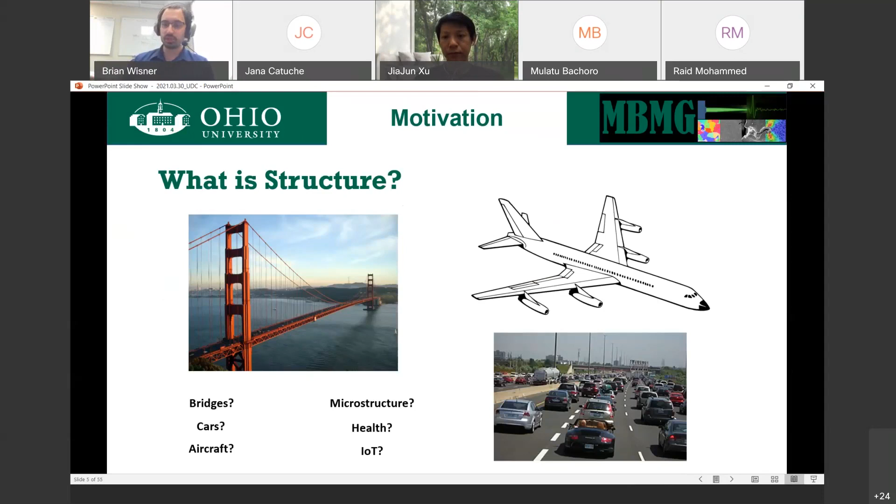Another term that I'm leveraging quite heavily is IoT - Internet of Things, mechatronics, the connection of electrical systems and mechanical systems. There are many terms I've heard for this. Ultimately, it's us trying to leverage as much as we can of knowledge of mechanical systems as well as electrical interfaces to improve the results we can obtain, to make things easier. If we're talking about advanced manufacturing, that's everywhere - we can't ignore that. So we're talking a little bit about all of this.

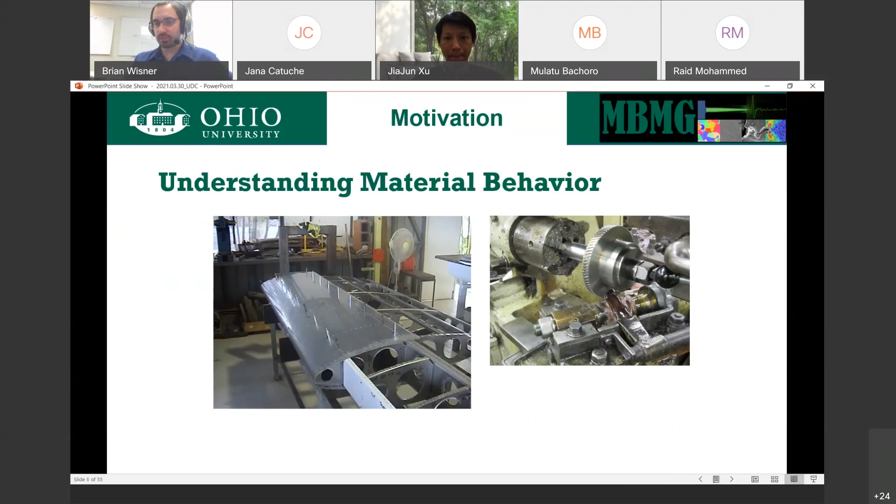So again, the focus is understanding material behavior. So if I want to understand the structure of the wing, understand this gear that I'm producing, I have to remind myself that as we zoom in, we're talking about a microstructure.

A different microstructure will produce different results. That's given. So if we can control the microstructure, if we can understand the microstructure, we have the benefit of improving the material properties to be something we may want. We can tailor the structure.

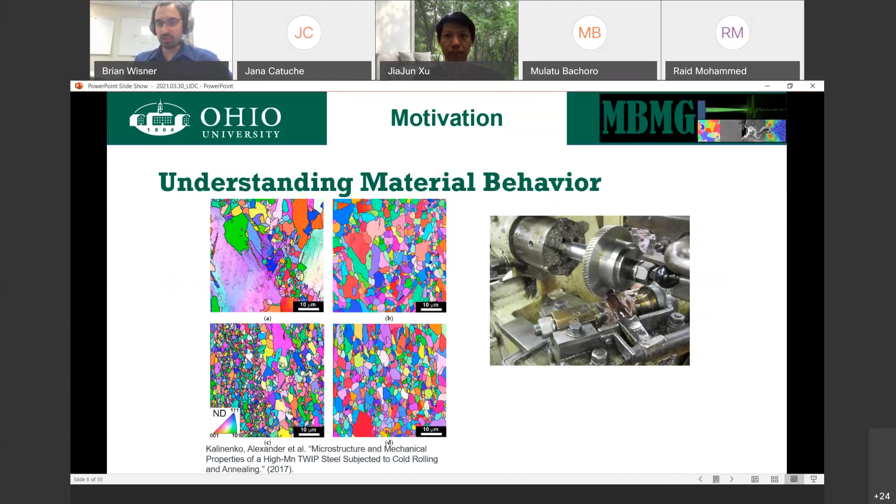We can alter it. Some of the ways we commonly do this now is in the manufacturing process. We do a rolling process, and it's going to alter the microstructure. In the case of cold rolling in particular, it's going to cause us to have elongated grains in one direction. That's useful in sheet, not so useful in a bulk, large structure where you want isotropic properties. But we can control that.

We can even go so far, in some concepts, as to induce cellulose in cement. We can add different elements at different scales in order to change the properties. Most of the time there is some thought behind this as to why we would do it, but we don't really know what's going to happen until we try it and test it. We can guess, but we don't really know. So part of the question becomes, can we monitor what's happening in order to figure out the result before we actually have to build and test all of these components?

And that leads us to this figure that I use all the time, from McDowell, showing the concept that materials are multi-scale. If we want to understand macro scale behavior, we have to understand what's happening at the subscales that lead to that.

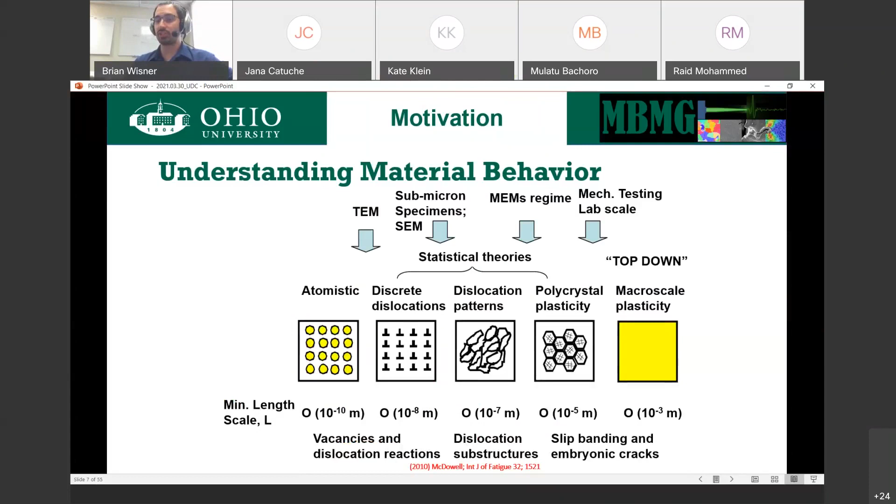That means we have to figure out what scale we are actually going to test at, what we're actually looking for. The questions being: what are we monitoring, what are we looking for, how fast do we have to be able to monitor this? Can I take an image a second, or is this a very fast process that happens instantaneously and I need something way more advanced? What scale is it happening at, to know whether I need a microscope or I can get away with a standard camera? And then where am I going to look for these things?

So how do we figure that out, how do we start working with that? The approach I'm using leverages microscopy - standard EBSD, scanning electron microscope, optical imaging, basically any way you can think of to get an image of what the microstructure looks like - combined with non-destructive evaluation tools.

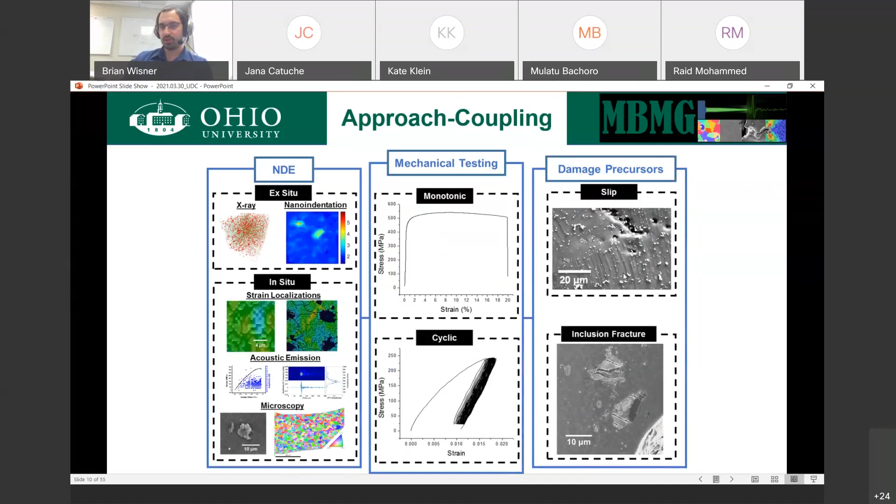From there, we can start to do a lot of cool things. For example, we can start combining techniques, DIC and AE together, surface information with volumetric information, to see how things evolve over time. We can start delving into the acoustic emission, and instead of just looking at a single waveform or this representation of dots, we can start to extract features that describe it. Those features can then be leveraged in machine learning outcomes to determine whether or not we have damage.

In this particular example, we're talking about aluminum monotonic and fatigue testing that this method was developed for. The emphasis I want to make is that those defects we found in testing produce the same type of waveforms that the defects that happen during manufacturing processes produce. So this is one method for us to start building a training set of data to leverage in machine learning if we want to do more advanced manufacturing type applications.

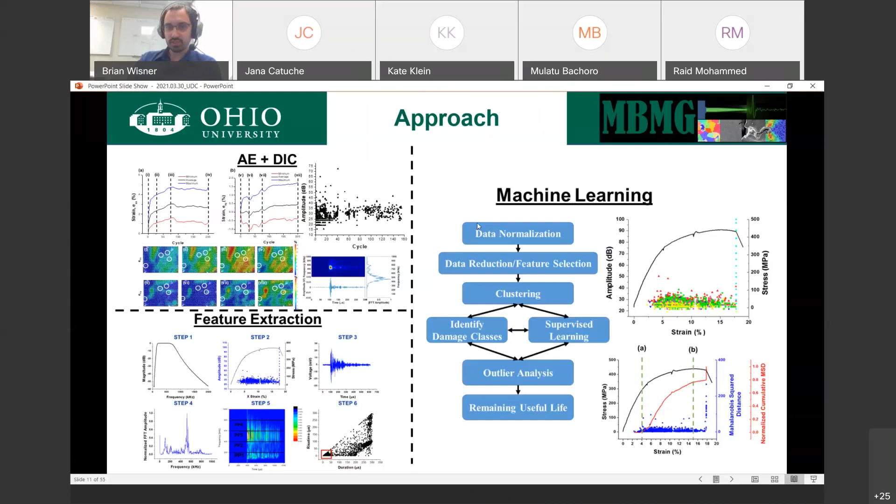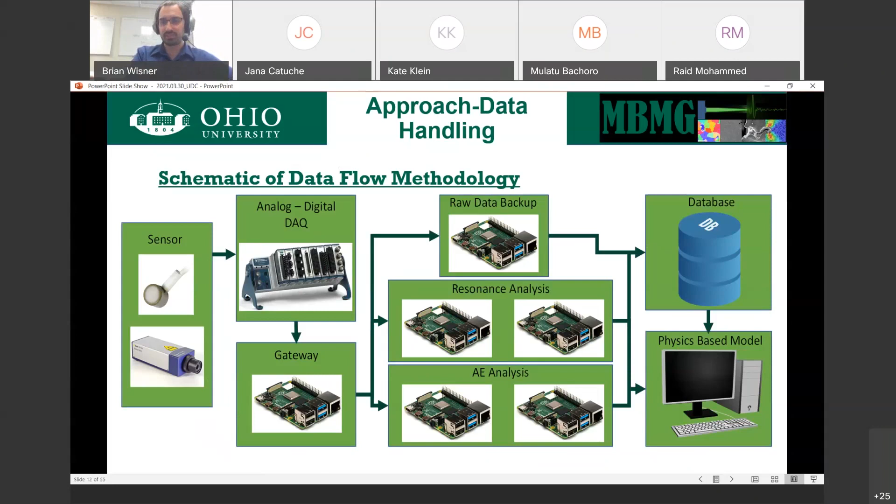Based on what we learn through materials testing, based on what we learn by interacting directly with the material, we can code this system to be able to do that analysis for us and ultimately compare it to models. Why? That's one of the easiest ways to do prediction. If we can get a nice connection between the physical and the model, we now have a way to help improve our data sets, to help really probe and turn knobs individually in a model that you can't necessarily do experimentally. Things aren't always decoupled experimentally, as much as we may want them to be.

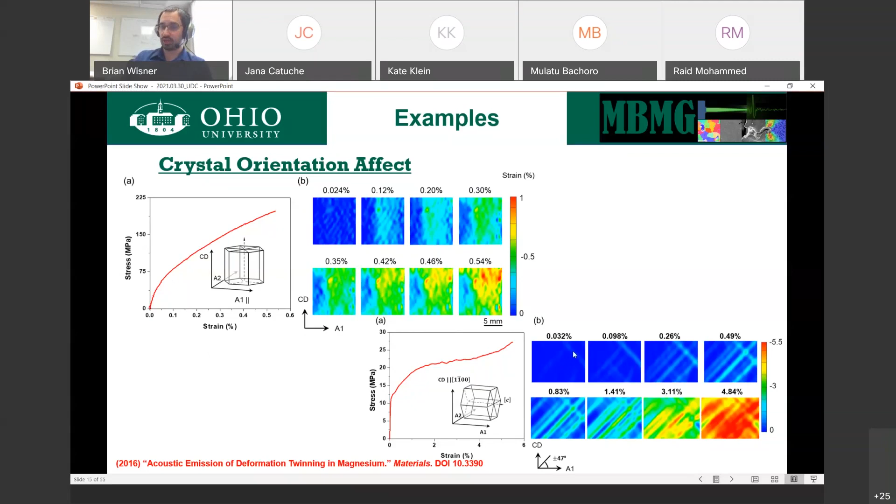We see a difference in the mechanical behavior as well, but that mechanical behavior comes directly from what the damage mechanisms are. That comes directly from the crystal orientation. Depending on how we manufacture, we can achieve preferential directions in one of these orientations or the other. If we do, we end up with a material that has preferential orientation and ultimately has different mechanical behavior. Makes sense.

We can then monitor this and not just look at the difference in mechanical behavior, but look at trends in non-destructive testing. So these dots that you see in both cases are acoustic emission trends. In both cases, we're seeing, generally speaking, that if you look at this, we have material here, we have energy in both cases that spike around yield, but there's a very different amount of activity going on. Why?

The reason is that the microstructure is evolving differently. The case here where we have the predominantly red orientation corresponds to the situation where we have predominantly dislocation type motions leading to failure. In the case on the left, the ND samples, we actually induce a mechanism called twinning. So we're causing a specific damage mechanism to happen to change the behavior. Usually we like to avoid these twins in order to ensure we don't nucleate cracks in fatigue. So knowing this, we can actually choose material orientations and subsequently choose material manufacturing processes that can give us that preferential direction.

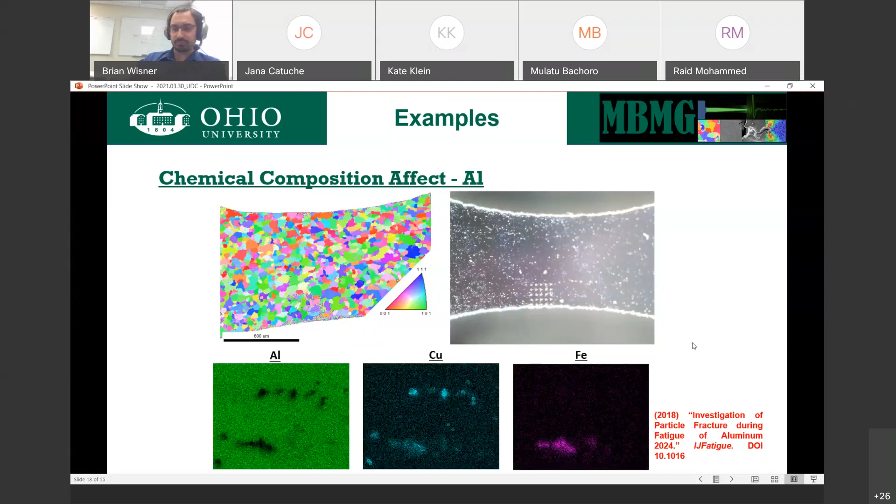Just so you're aware, we went through and validated what each of these particles is made of, and there's a reason for that. We also went through and characterized what the structure looked like to begin with, just so you have an idea.

The red are the particles, the green small dots that are very hard to see are voids. This particular material was hot rolled, and we achieved a material that has very low voids, a very small amount, and not too many particles.

And we characterized how they're distributed in space. In this process, we achieved a material that has particles fairly uniformly distributed. The particles in this case are represented by the blue histograms. And we have voids that are not quite uniformly distributed.

They seem to predominantly exist below the surface in the normal direction. So as we rolled, we essentially affected how the voids on the surface compare to the ones below the surface. That's going to change the way it behaves.

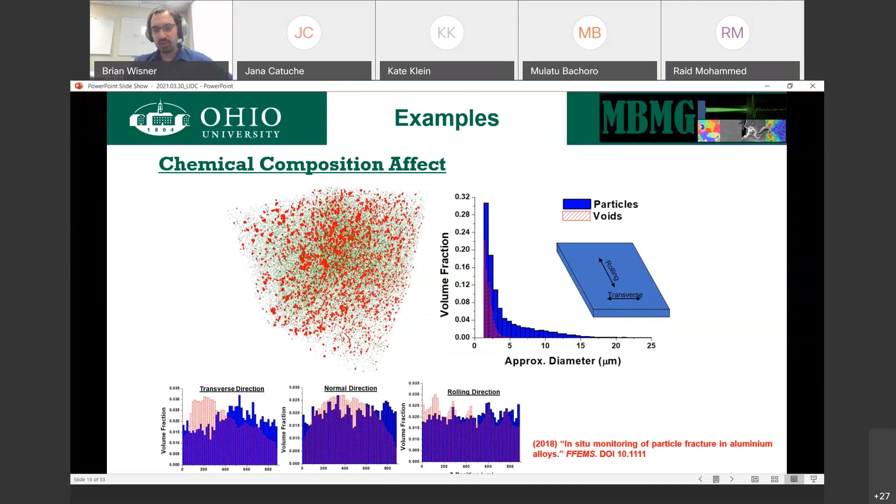If we look into this, we want to keep in mind that not only do we have voids that are different, but we have different particles that exist within here. And as we process this, as we apply loads to this—and anytime you think about processing, there's going to be loads applied, mechanical or thermal—either way, it leads to stress concentrations, strain concentrations, and damage if we're not careful.

This is an example of some of the particles that exist, 3 of which broke, 1 didn't. The copper-rich particles seem to be stronger. That's useful information.

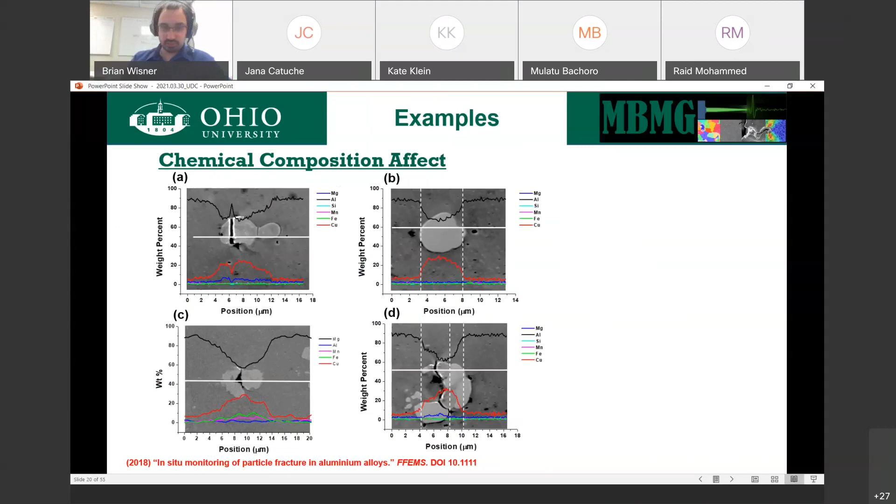But the real takeaway here is if we want to think about this material, it's made of aluminum, and these particles are essentially embedded in it. It's basically like a composite. And if we map the material properties around this area, you will see that there are concentrations of elastic modulus and hardness that are different from the surrounding aluminum. This difference in mechanical properties is going to cause stress and strain concentrations and lead to failure.

Can we detect that? Well, first, let's figure out, to some extent, what we might be interested in detecting. So to do that, we're going to do some modeling.

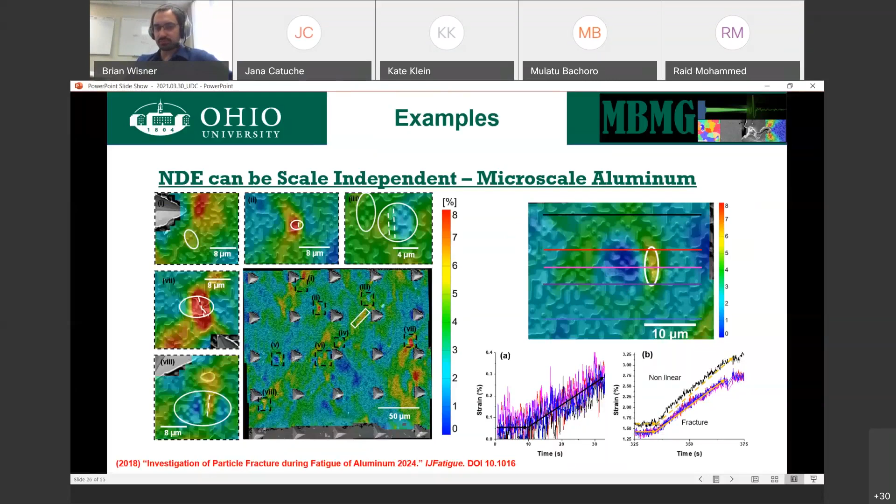Well, the question becomes, can we actually detect these? Do I need to actually image this at the microscale every single time if I want to be able to figure out if it's getting any better? Short answer is no. What I'm showing here is an example of indenting directly onto a particle to cause a fracture versus indenting on the aluminum.

The reason I'm showing this is I monitored acoustic emission, energy release from these processes. When we fracture the particle, we get a very clear burst energy release. When we do the aluminum, we don't. That means if I want to reduce these fractured particles, acoustic emission on its own is a valid way to determine if my processing parameter changes have achieved my desired result. If I get fewer of these hits of these signals, then I'm fracturing fewer particles. Makes life really easy.

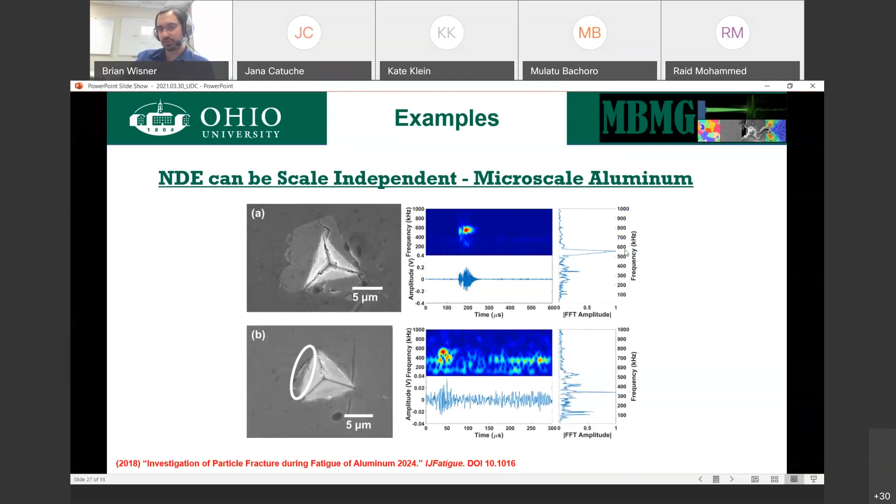We can then extend that and use it to talk about other properties. In this case, fatigue, low cycle fatigue. Looking at this waveform, we can characterize it. We can say it has high amplitude. We can say it has high frequency, about 500 to 600 kilohertz. We can figure all of these things out and plot them.

What we see is that if you look, those signals are an early mechanism. That's an early defect mechanism. That's a mechanism that initiates crack growth. That's a mechanism that can exist under surprisingly low loads and can alter the behavior, which means it's something we might want to be aware of as we're processing materials to use. Are we fracturing a lot of these particles during our processing that's going to alter the behavior of the material?

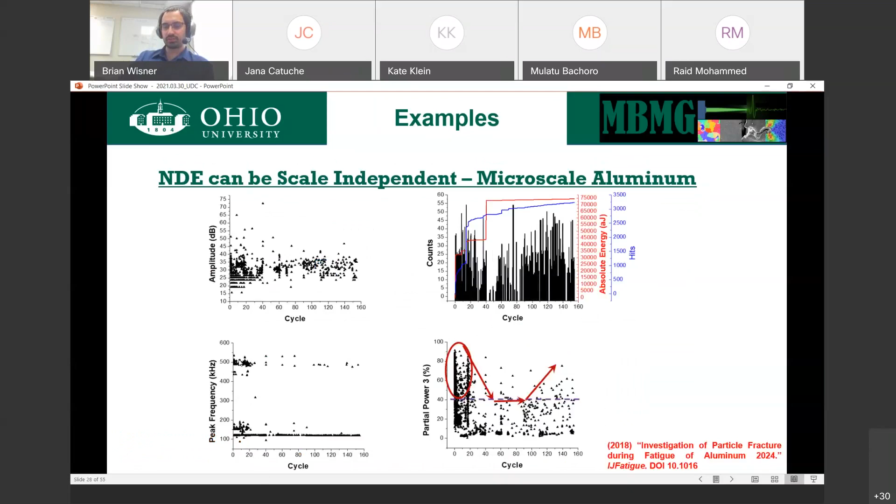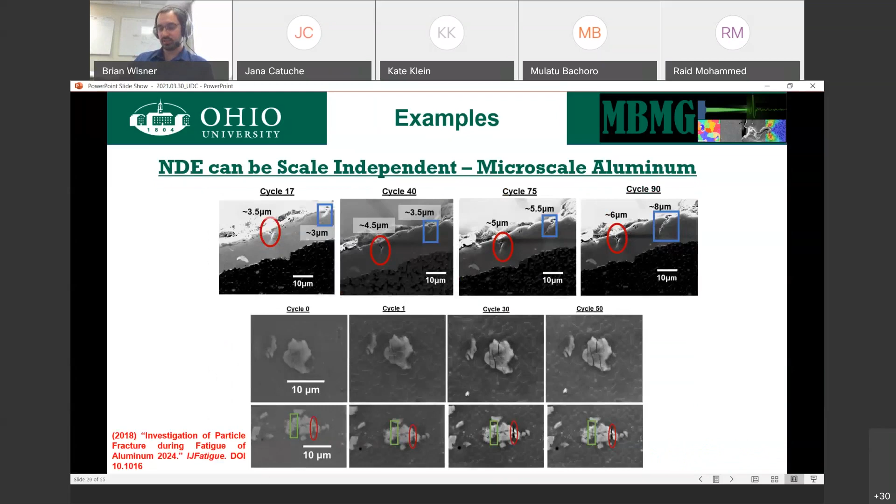What we also see as validation is that these particles are indeed fracturing. And then we see that when we reduce the number of these signals, we actually have cracks starting to grow in the aluminum on the surface. So, our AE is reliably telling us about microscale damage mechanisms. That's good.

It's not metal specific. The point of showing this is the use and power of the methods in order to improve material properties. This particular example was a question DuPont came to us with. They said, hey, we have this material, it behaves in a certain way, this red line. We're trying to make it more damage tolerant. Can we characterize what's happening to this material so we can make informed decisions about how to alter the structure? So what we did was take this, apply the load, and do this first at this scale.

We did this in order to prove that there isn't any significant out-of-plane motion, to prove that microscale investigation can work. Once we do that, we can bridge the microstructure, the full three-dimensional microstructure, to how the material fails based on the non-destructive testing. This is just with DIC, not even considering acoustic emission yet.

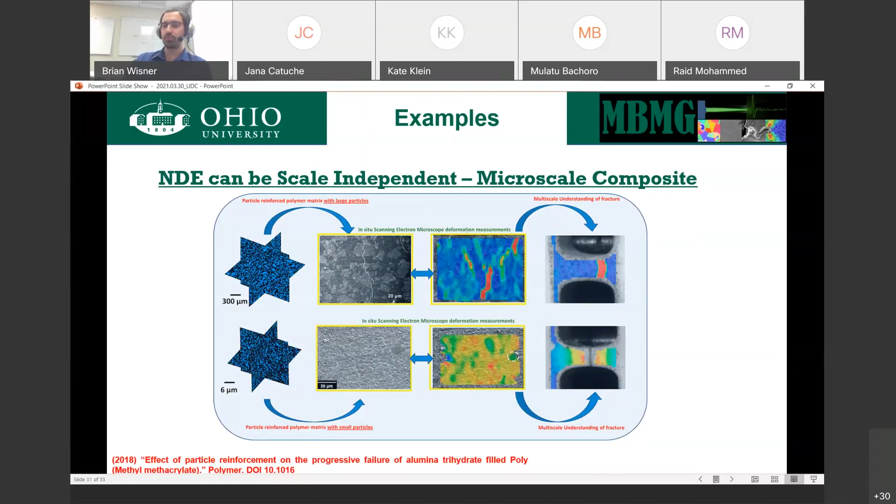It's very clear that in the case of the first material, we have large particles and it's very brittle. In the case of the second material, we have small particles. Both materials are made from the same things; the only difference is the size of the particle. And we have much more ductile failure. Instead of particles fracturing, the material is growing around the particle, growing through the polymer.

And AE shows that beautifully. Where the particles fracture, there's a lot of activity going on. Where you have the polymer failure instead, there's very little acoustic activity. Knowing this, we have the possibility of saying, well, clearly the smaller the particle, the more ductile we become. But we do so at the sacrifice of the load.

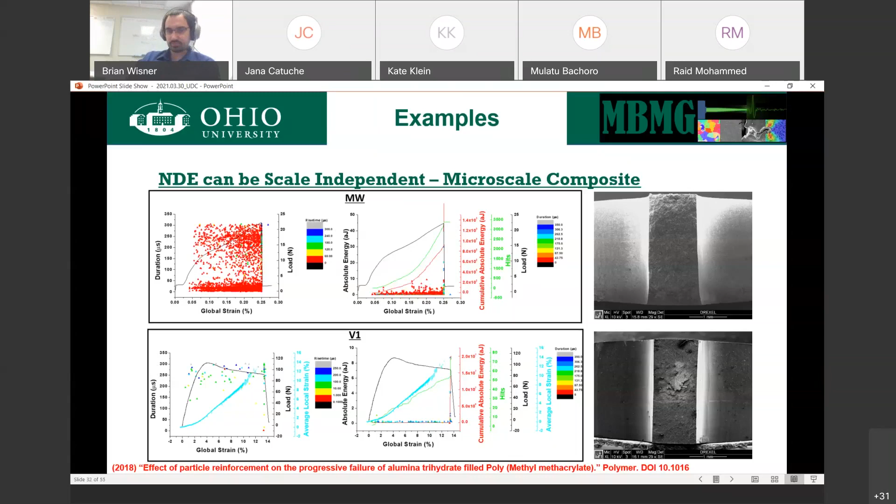We change the load. Can we alter these things? And just to show you exactly what's happening, this is what you see here. As you step through it, through the fractures, you barely even see the fractures here.

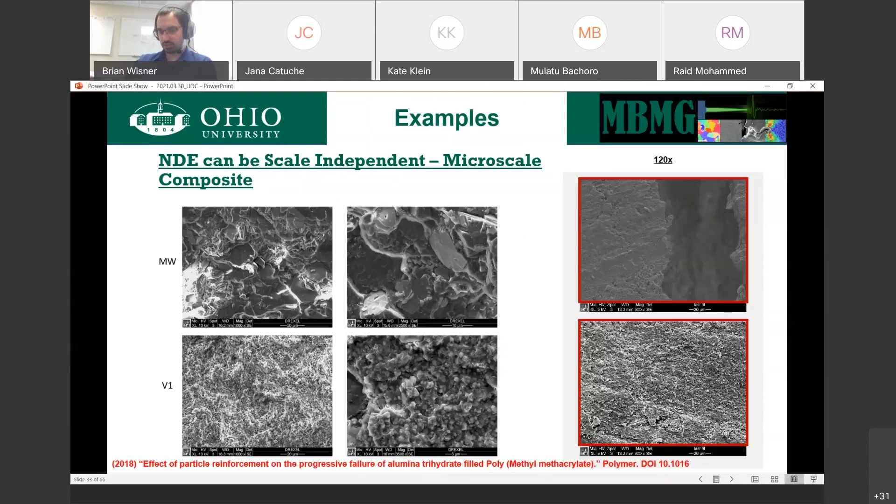They're all extremely small. What that means is the way this material was developed is that instead of having a single crack that grows across the whole thing, the particles placed in here are of a size that actually impedes growth. It grows to a certain size and stops, and another location nucleates. As a result, we get much better elongation behavior.

The same thing can be done. Instead of at the microscale, we can move up to the mesoscale, to the macro scale. The point of showing you this is to indicate again why we're talking about AE and DIC together: this material is made up of a layered composite structure. If we want to understand how the layering is effective in causing changes, we have to know what's happening in the middle of the material.

DIC is only going to tell me about whichever surface I'm looking at. It's very useful, very helpful for that. It shows me that you have debond between fiber and polymer, but you have no idea what's happening on any of the other layers. And so with acoustic emission, we could start to look at the fact that we have activation of different mechanisms at different times.

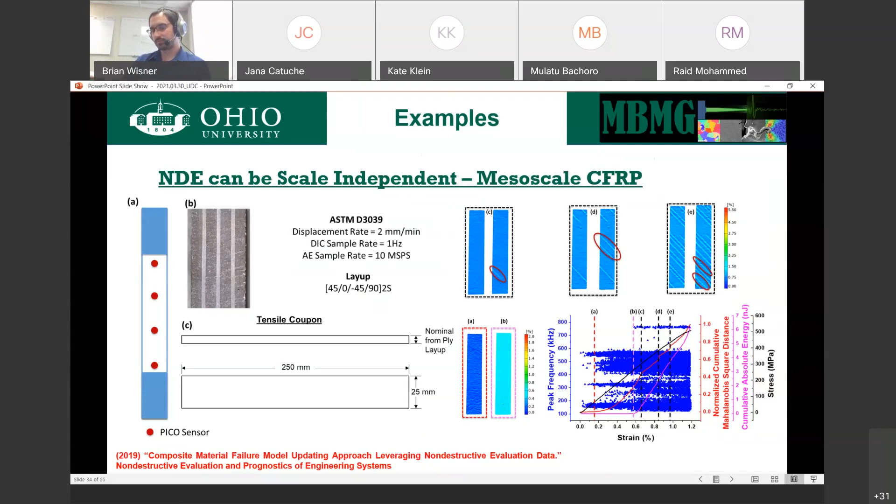Now we can start to piece together that this material fails by matrix cracking. Then you have debond on the fibers on the surface. And then eventually, much later, you have fibers themselves starting to fail. Very helpful. Now, that's nice, but that's a lot of data and very hard to figure out. And it's a case-by-case situation.

That means we need some way of dealing with this in order to make it useful for in-situ processes. If we want to monitor the manufacturing process itself, we have to do it in situ and process the data fast. That's where machine learning comes in. If we do all of this background work, we can start to piece together, based on the microstructure, based on the NDE, based on various investigations we're doing, very controlled experiments in combination with modeling.

We can identify the difference between final fracture, damage initiation, and noise. From there, we now have the chance of saying, okay, if I'm doing a process, if I'm manufacturing this, I want to see if I induce a crack during my process. Well, now I know what a crack looks like.

Now I have a chance during the process of being able to detect that it happened and tell somebody that it happened.

This can be applied both in monotonic and fatigue situations, and it's very helpful. This is not the only option. There are methods of doing basic outlier analysis as opposed to very detailed clusters. If you do outlier analysis, it gives you an idea of whether it's damage or not. If we do something like this, not only can we say if it's damage or not, but we actually have a chance of saying what kind of damage. Can that damage be fixed? Can that damage cause this thing to have to be removed from operation? Or is that actually just the start of nucleation and we just have to watch this more closely?

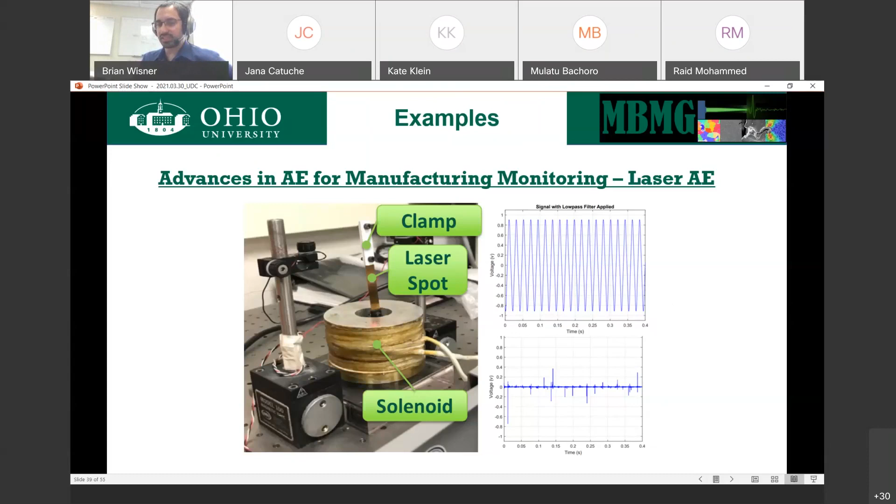What we're seeing here is two approaches to non-destructive evaluation with one sensor. The top monitors the resonant frequency. We're vibrating this at the theoretical resonant frequency of the material. Once a crack grows long enough, the amplitude should drop. The bottom is acoustic emission. All of this comes from the same raw signal, except filtered.

So we can see very clearly that embedded within this frequency, within this vibration, is this piece of information. We can also see the frequency that I'm applying here. There's an additional little error here with these bumps at the top, just to show you how powerful this can be. That was a fractured grip. We were monitoring nowhere near the grip, yet we knew the grip was fractured.

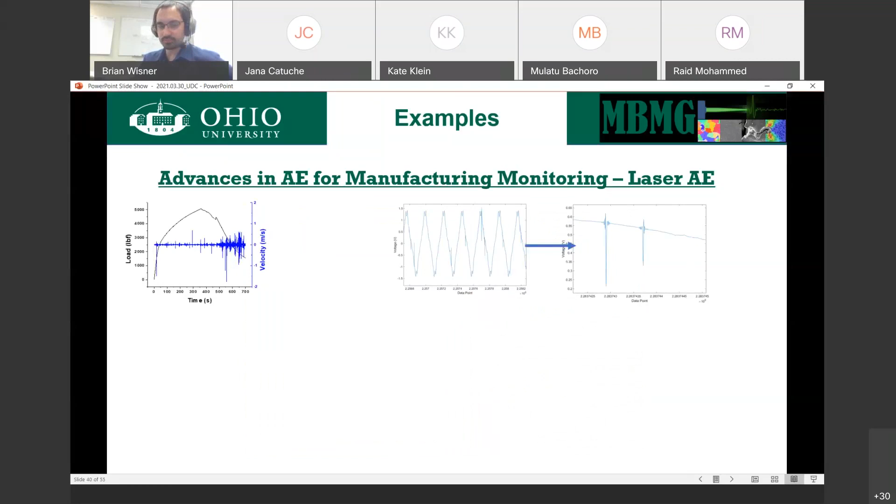We're exploring other ways of doing this. How can we get useful information out of these waveforms without having to go through the detail of doing complex filters, extracting each one of these waveforms, calculating all the features for those waveforms? That takes time. It makes it impractical if we're trying to detect damage. We're trying to detect it in a time that we can actually do something about it. That's a problem. If we're doing an additive process and we see a fracture happen on the surface we just built, we'd like to be able to go back and try to patch that before we do the next surface. If we don't start exploring new ways of dealing with this data, we're not going to be able to do that in a timely manner in order to correct it well. What we're exploring here is different spaces to do this analysis: frequency space, temporal space, compared to the load data, and see how things go.

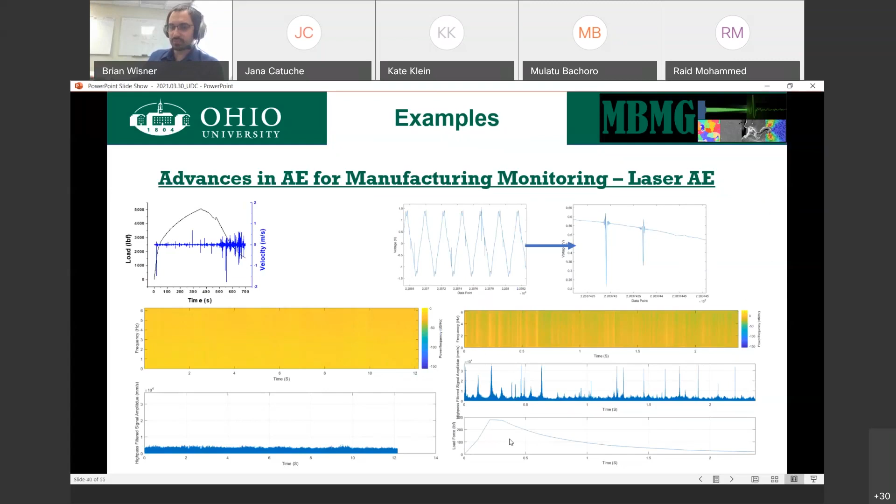Two, ex situ data coupling. Ultimately, we want to do this in situ. But if we're going to do that in situ, we have to be able to couple the data together. To do it in situ, we need to know what we're supposed to connect, which means experimentation offline first. What are we looking for? So in this particular situation, we're trying to develop a coal-based polymer composite material for structural applications.

So we're exploring this from two aspects. First, we're trying to understand what effect this has on the material, why this is happening from a chemical and manufacturing process perspective, and can we adjust it. Second, can we monitor during the process itself to see whether or not this happened? Right now the only way we know is either put it into an X-ray system or break it and see if there's a pore in it. So can we monitor the process to determine that this has happened in order to make adjustments, to make a correction, to fix that?

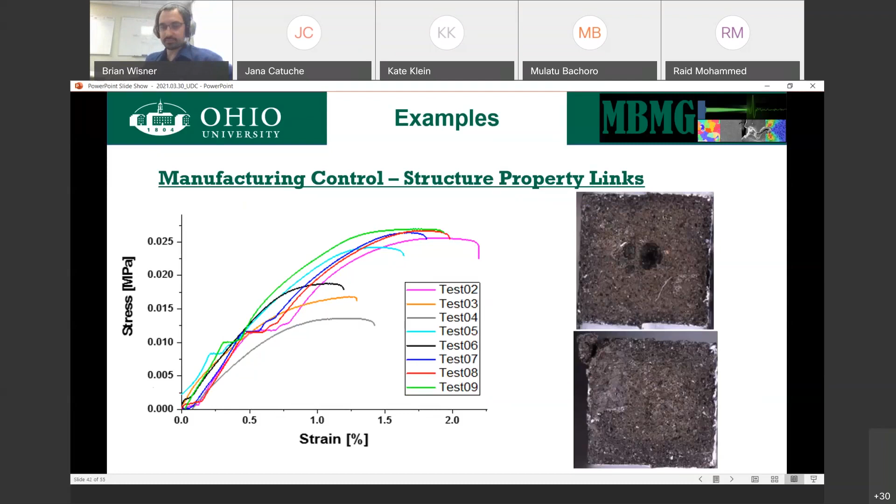This is very similar to the work we did with DuPont, and what we found was these two composite materials made with the same parameters, same particle size, same weight percents, have very different mechanisms. Pitt 8 fractures brittly, particles fracture, PRB doesn't. What I want to make clear is Pitt 8 and PRB are both coal. Theoretically they're the same thing, they just came from different sources. So the manufacturing process we use for one of these sources clearly is not working for the other. So what can we do to fix that? That is a question we are still trying to answer. We don't fully understand yet what exactly is causing the difference between these two.

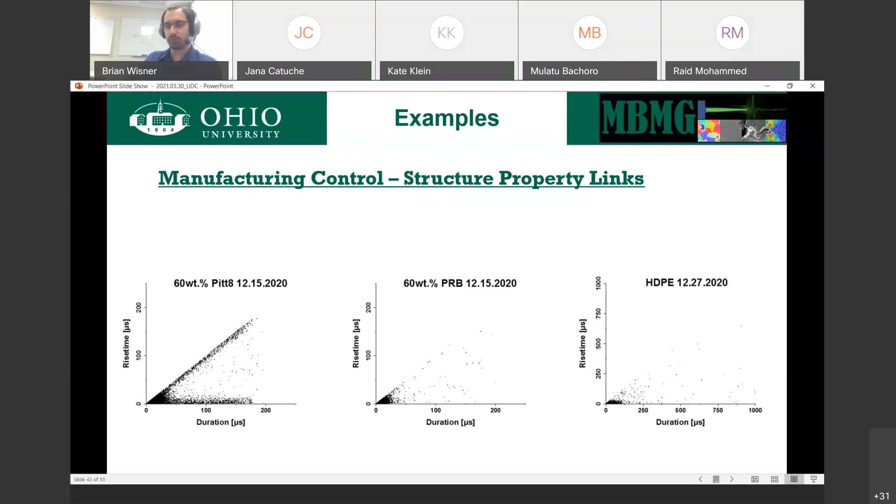Just to emphasize that, so instead of just looking at this kind of waveform, we can overlay it with a load curve so you can see a little bit better what I'm talking about as far as how this material is so much different than the others.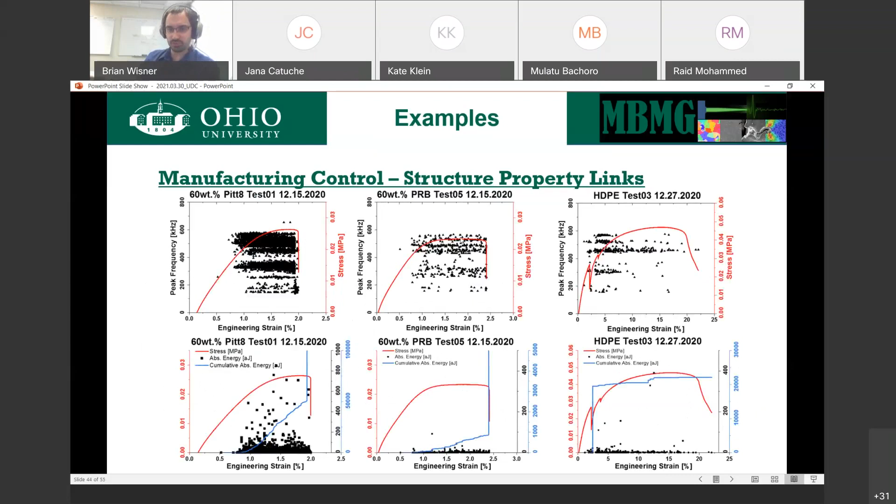We want to try to do this kind of coupling with the manufacturing, doing it during the physical testing to see what's happening. So, as I alluded to before, we started playing with an IoT concept in order to do this analysis.

This left schematic is our current data flow process. We take the raw data, we filter it, and place that into a hard drive for storage because we want to make sure we don't lose data at this point. While that's happening, the hard drive can be read into other systems that can do Fourier transforms, identify peaks, do different plotting, potentially do outlier analysis. We can keep adding to this flow, but this is the current scheme.

This is done using a cluster of microprocessors. In our case, we're actually implementing Raspberry Pis. The premise is this external hard drive is our link between our data source and the processing itself, so as the data is collected, it's periodically dumped into this drive to be immediately processed.

We're exploring two possibilities here. One is to continue this kind of dump process approach. For systems where we're talking structural health monitoring over long periods of time, that makes sense. If we're talking about manufacturing processes, that makes less sense, because by the time you've processed one of the data dumps, it's probably too late to fix it.

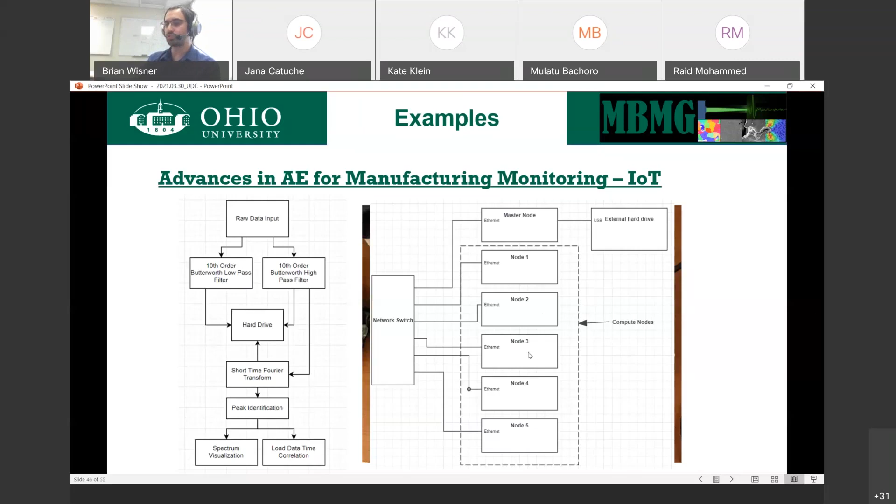And just to give you an idea, this is ultimately what it looks like. Right now, with just a basic setup, we're looking at 5 processors, the external drive, and then data collection offline.

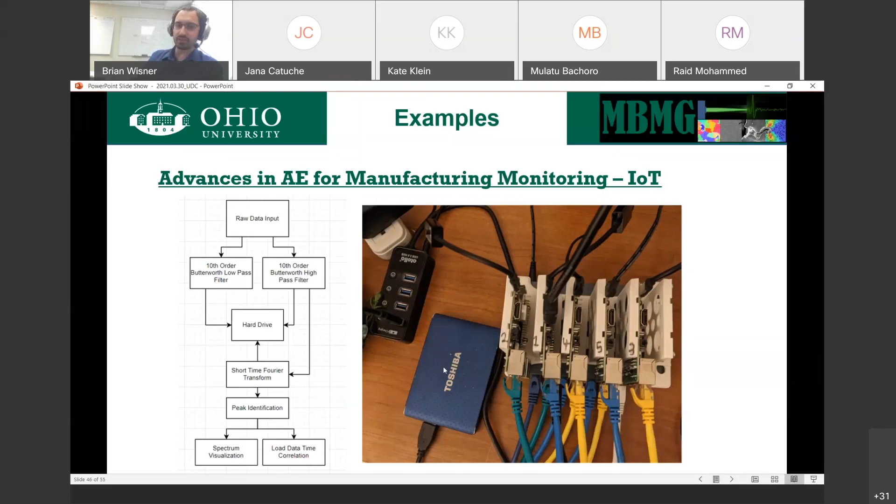What can we do with this? This is an example of us monitoring an extrusion process. We're extruding aluminum wire, trying to improve the conductivity of that wire. So what you see here is the extrusion pressure in red, the ram displacement in black, and the acoustic emission in blue. On the right-hand side, we also have acoustic emission activity in red and green, just to give you a couple of different ways of seeing what's happening.

You'll notice everything is fairly consistent. There's nothing out of the ordinary. You don't notice anything very unique during any of this process, even during the initiation of force. Nothing really changes much there.

Until this purple box region, suddenly there's a lot of AE activity going on. Has a lot of energy. So the question is, what happened during this process that caused that change? We don't really notice any difference in the force that's being applied. We don't notice anything in our parameters that we're using to manufacture, but something changed.

And we actually look at these waveforms. We notice that early on, we have this very consistent, repetitive, machine noise almost looking wave. And then later, with these here, we have these very burst ones that look a lot like fracture. The frequency is lower, but they're sudden. So something happened suddenly. We don't know what it is just from this.

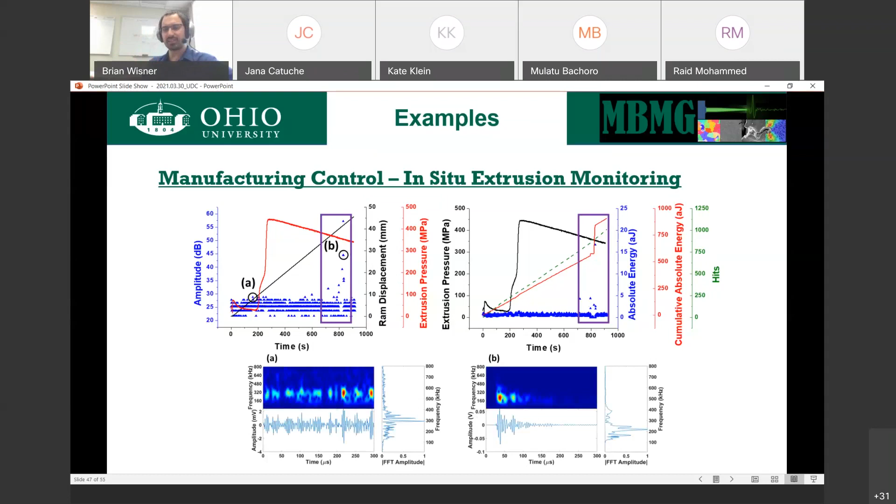But what we do know is that if we plot the electrical conductivity as a function of material length, and we plot the AE as a function of the material length, whatever caused these signals also caused a change and an improvement in the electrical conductivity. So this section here between 20 and 60 inches in length is a consistent process. Up to 20 inches in length is the initiation of the material, so that usually gets cut off. And this end point usually is the end of the material that gets cut off. So something changed at the end that causes us to have better conductivity. If we can understand what that is, perhaps we can find a way to replicate it earlier, so we improve the electrical conductivity overall over this entire wire.

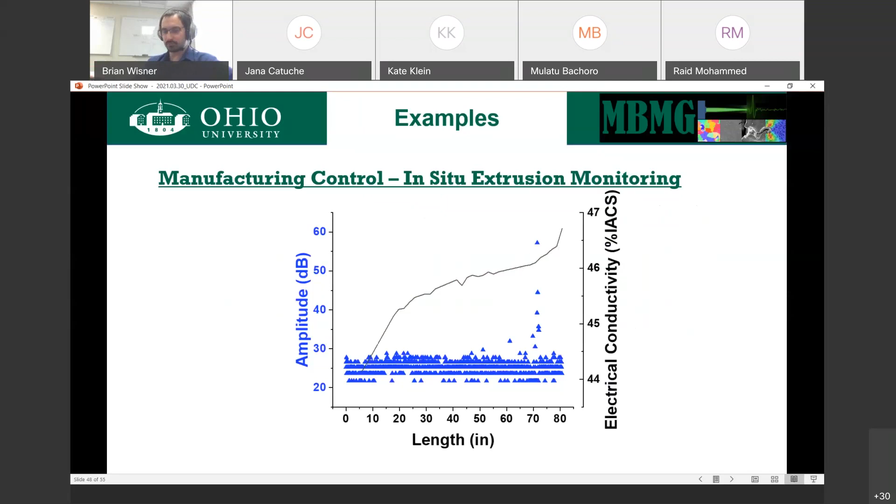Now, the one I spend most of my life on, NDE for additive manufacturing. I mentioned before I went through a detail of that aluminum material, and I did it for this reason. We were trying to understand additive properties, additive parameters on how the material responds. So we call this nominal, 50% reduced, and you'll see there's also a 25% reduced. Nominal is what literature proposes as the optimum manufacturing parameters for aluminum, silicon 10, magnesium. 50% reduction in power means we took the laser power and just cut it in half. And we wanted to see what would happen.

To give you an idea, starting with nominal, 25% reduced power, 50% reduced power, we have less material bonding. We have more pores, more lack of fusion defects. Makes sense.

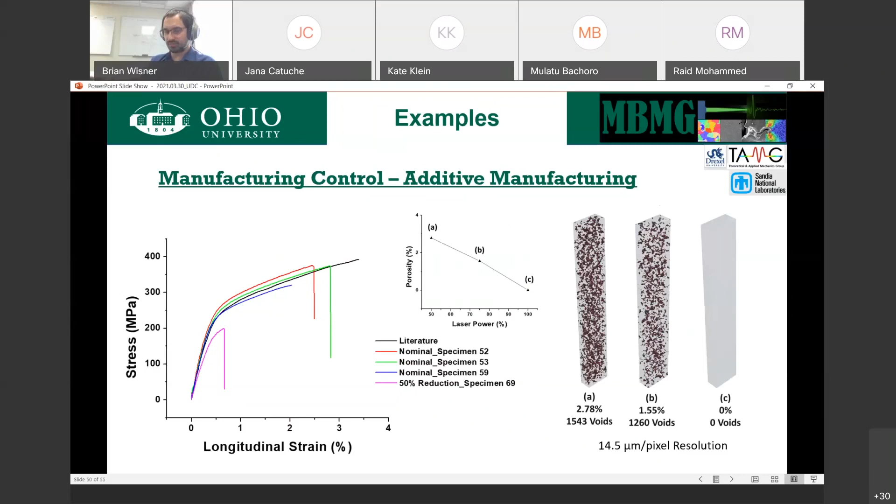What we also see is a significant change in how the material fails. The properties are very different. In nominal, we have very good plasticity in zones. In 50% reduced, we don't - it basically yields and breaks. What was interesting was the fact that you have so much more AE activity in the 50%.

Well, we can throw everything we have at this - X-ray analysis, acoustic emission - look at the different AE features we see, and we notice there are some similarities between these two materials, but there are some differences. And what's essentially happening is, in the case of the optimum configuration, there is a single weak point that is dominating its behavior. So while it's optimum, you have one primary location that's going to fail. Whereas in the case of non-optimum, you have a lot of nucleation zones. You have a lot of voids that could lead to failure, and what's happening is a number of them are fracturing. So you have many locations where cracks are growing and stopping as they interact with other voids.

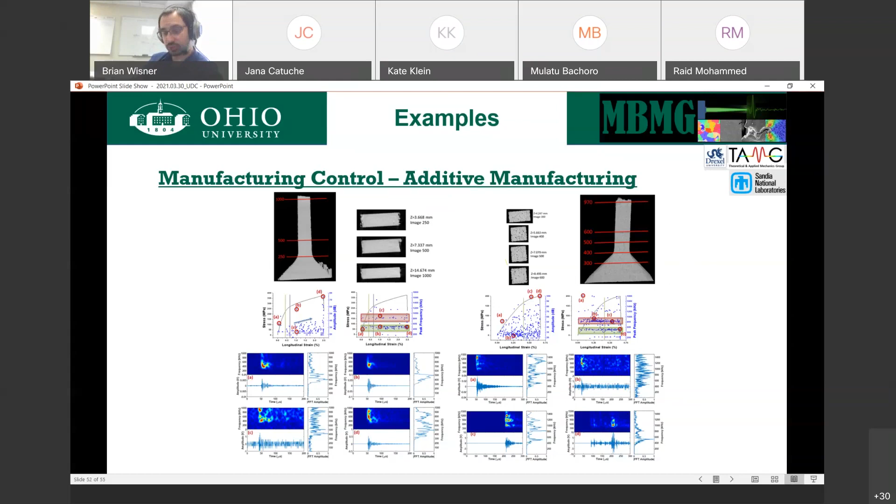That's actually a process with arresting the crack behavior that could be useful if we can figure out a way to locate these as we're building. Can we control where they're placed, their size, their shape? That leads me into one of the processes we're working on now.

In this particular case, what we're trying to achieve is to use ultrasound to change the grain structure of the material during a 3D print. Ideally, we will be monitoring this to see if we're being successful live.

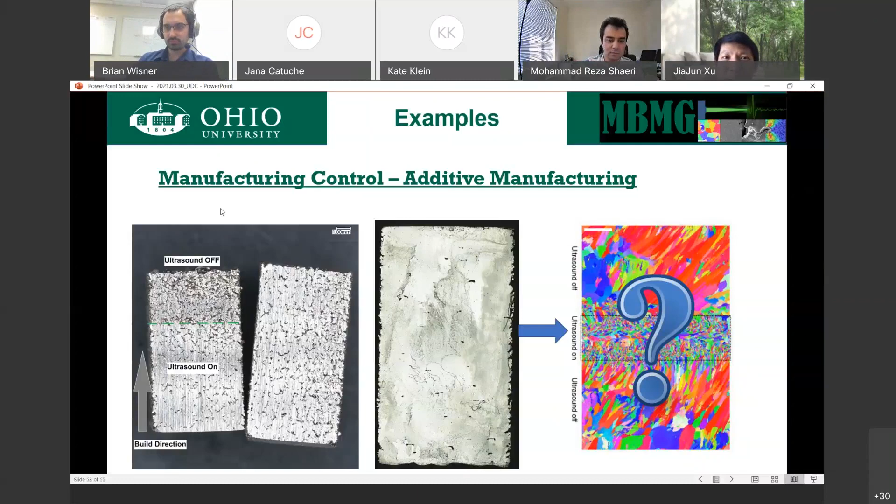Okay, thank you. One question that I have, I know you are talking about the micro scale, and I'm wondering if we go down to even the angstrom scale or nano scale, the size would be comparable with the structure of the material. What would change in the nature of this computation or research you envision when you go down to that size? Yes, so there is a concern between bulk behavior, thin film behavior, and non-representative behavior, because as you scale up, obviously you're going to have nearest neighbors, second nearest neighbors that all start to affect things.

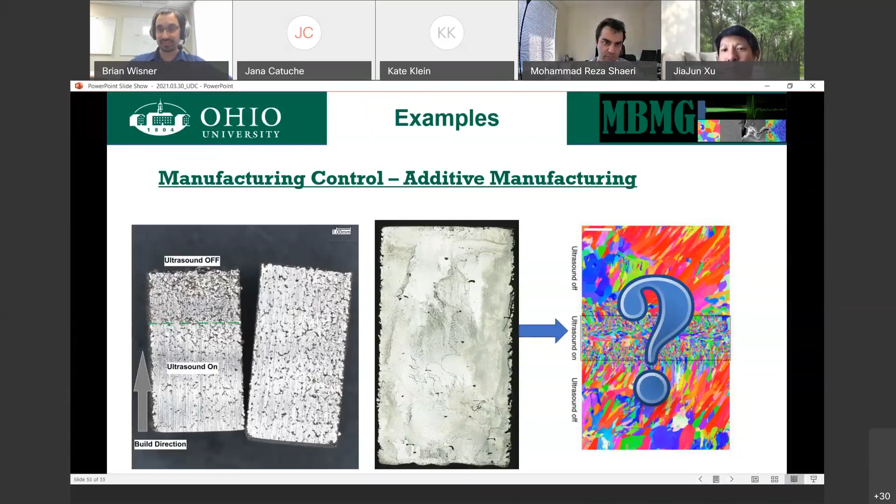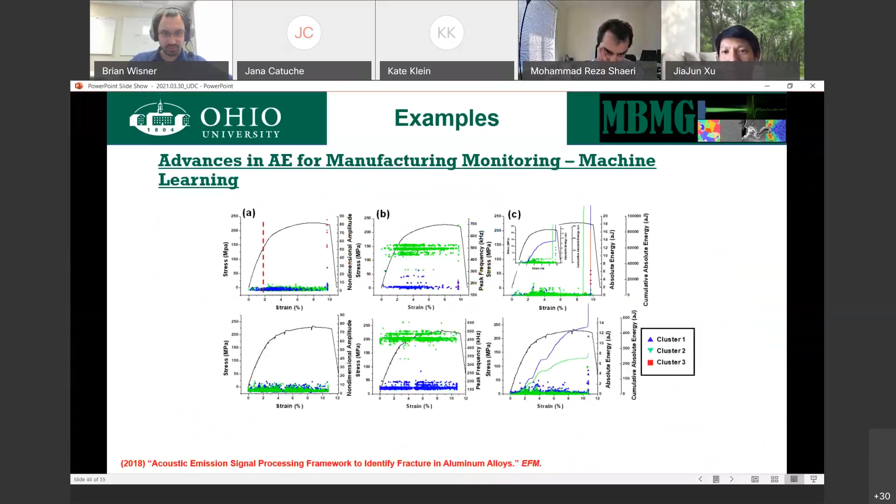That's part of why I propose the experimental approach, because we can layer by layer, experimental and computational, add those effects in. So what I should show, let me go back, assuming this works. This model I originally showed you, which I'm hoping to continue to pick up a bit more. Where is it? This guy was a very quick...

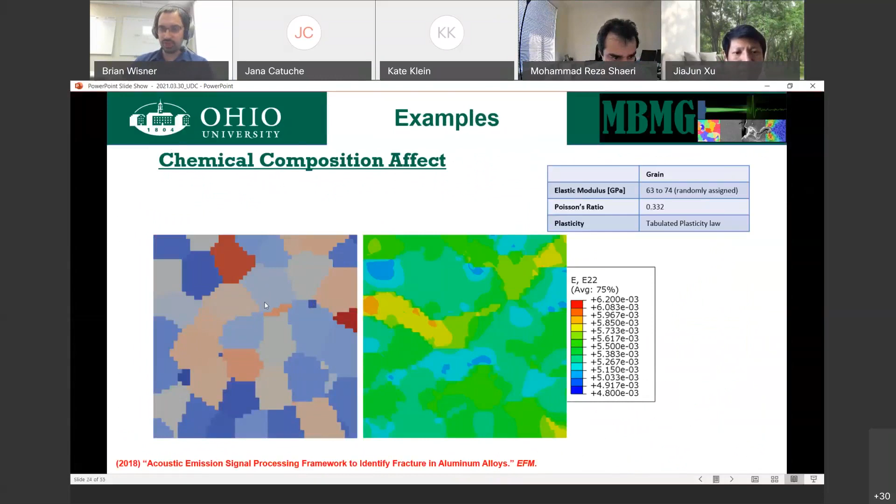...approximation, not considering nearest neighbors. This was only the effect of the crystal structure itself, we didn't talk about the neighbor or the next one. So part of the exploration, and that's why I was showing you this, even this model we did here was a single grain, not considering the effect of how a neighboring grain would change the strain that comes into here, which will affect this behavior.

But the trick behind a lot of the modeling we're doing is trying to isolate the energy release from a given mechanism, from a given concept. So by doing it this way, we're able to focus and force the fracture and see what the effect of one parameter is. What we will obviously need to do is start to add in the others.

And as we go down lower in scale, this challenge is going to get worse. Every time you drop a scale, there are many parameters that come together that are required in order for you to predict what's going to happen at the next scale up. This is the challenge of multi-scale modeling that's always existed, and it's true of experimental work as well. As we go down in scale, we're going to lose bulk behavior.

But we will be able to probe individual mechanisms, individual parameters, and make that connection to what the NDE is. For example, when I did my NDE at the microscale with the particle or nano indentation, that is a very singular particle response, but its wave propagation that was produced was the same because I used the same sensor for both scales. Does that make sense?